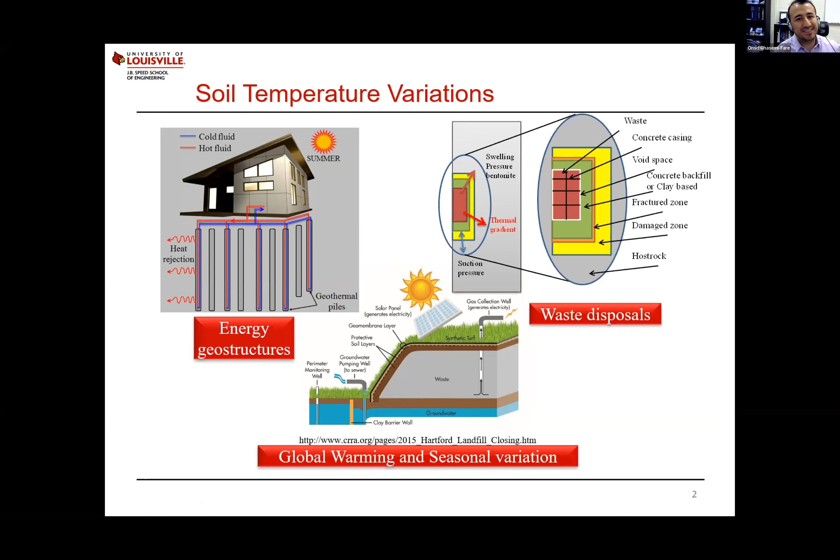Apart from energy geostructures, embedding nuclear waste disposals in the ground also changes soil temperatures, as does seasonal variation of temperature around the world. Different countries have different delta T between summer and winter, as high as 50 degrees or more, which affects shallow surface soil temperature changes. That's the scope and focus of our research: to understand the effects of temperature on soil behavior.

When we look at temperature's effects on soil behavior, we can see that temperature changes the hydraulic conductivity of the soil. The first thing that comes to mind is that groundwater properties are highly temperature dependent, like viscosity, so we expect different changes in hydraulic conductivity. But how about the intrinsic permeability—are we going to see any changes in the intrinsic permeability of the soil medium because of this thermal loading?

And also the strengths—can temperature changes affect the mechanical side, like volumetric changes? Can this happen because of temperature? We call this thermal consolidation.

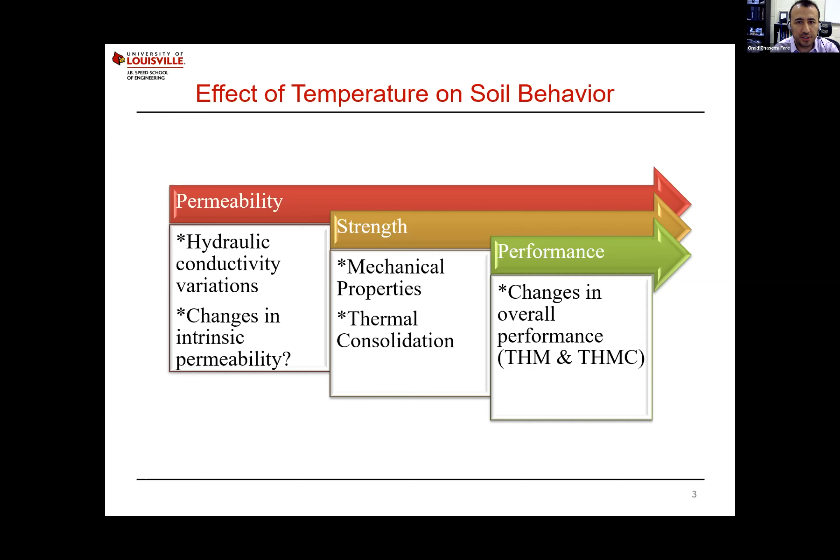Overall, temperature can change the whole system, which is highly interacted between the hydraulic system and mechanical system. So we have to provide good insight and develop a fully coupled thermo-hydro-mechanical modeling, or thermo-hydro-mechanical-chemical modeling, for different cases.

So the coupled thermo-hydro-mechanical modeling has three separate physics: hydraulic, thermal, and mechanical, which are highly interacted and interact with each other in this thermo-hydro-mechanical response.

For example, with hydraulic loading, when we have groundwater flow or any flow in the soil medium, that causes heat convection and changes the soil thermal response. On the other side, temperature itself can induce pore water pressure—that's the interaction. For thermal and mechanical, thermal loading may increase volumetric changes, and if we have porosity changes or mechanical load causing changes in soil volume, that will also affect the thermal properties of the soil.

Hydraulic and mechanical interact the same way. This is all highly interconnected, and we need a fully coupled system to better capture the thermo-hydro-mechanical response of the soil.

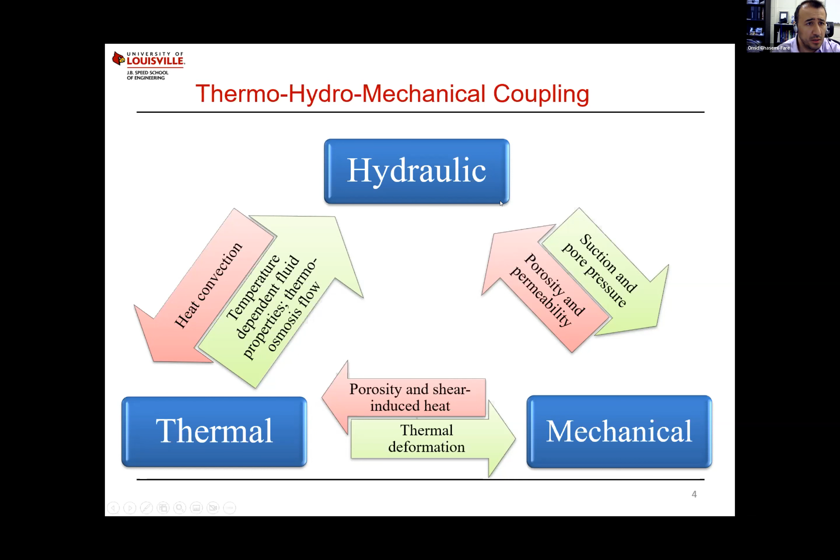The core of this study is focused on saturated soil. We are looking at temperature increments and the response of the soil due to this delta T, or thermal loading. But first, we need to classify this into two big categories: low permeable soil and high permeable soil.

Low permeable soil is what we know as fine soil, like silt or clay. High permeable soil is coarse soil, like gravel or sand. The reason I divide this—you'll see the results and understand why I make these two categories.

In high permeable soil, what happens is that a temperature increment can cause groundwater flow even under hydrostatic conditions—what we call thermally induced water flow, or thermally induced pore water flow. This flow can further change the temperature because of the heat convection mechanism.

In low permeable soil, because the permeability is very low, we won't see this significant effect—the thermally induced pore water flow is negligible. But because of low permeability, if we have thermal loading, we will have thermal pressurization, or thermally induced pore water pressure. Then, through generation and dissipation of this pore water pressure, we'll have thermal consolidation or thermal volumetric changes.

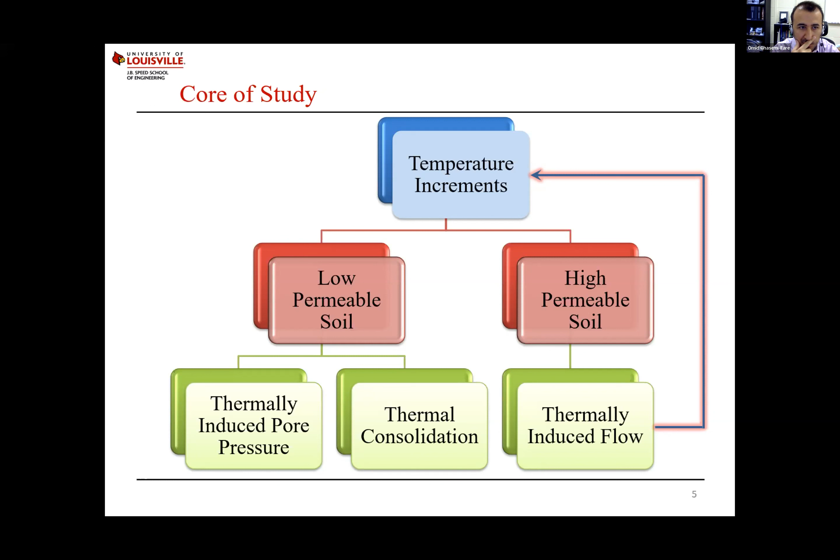During this presentation, I will go through different research tasks that we performed to answer our research questions. One task was the experimental side, to understand changes in permeability or hydraulic conductivity of the soils with thermal loading. We also did thermal volumetric change tests to understand the thermal consolidation of clays. After the experimental part, I'll focus on the numerical side of our research, which is modeling the hydrothermal behavior.

I'll first start with the hydrothermal modeling, called coupled heat and pore water flow, to show how temperature increments can cause thermally induced pore water flow. Then we have coupled THM modeling to capture thermal, hydraulic, and mechanical responses and the interactions between these three mechanisms. So first, I'm going to focus on the experimental research we did, starting with permeability tests.

To understand the effects of temperature on the permeability or hydraulic conductivity of the soil, we modified our triaxial cell and used a temperature-controlled thermal cell. Compared to a regular triaxial cell, this system has a constant water bath and circulated, controlled fluid temperatures inside the cell, allowing us to control and change the temperature of the soil specimen. We did some calibration, and then had the device ready for permeability testing.

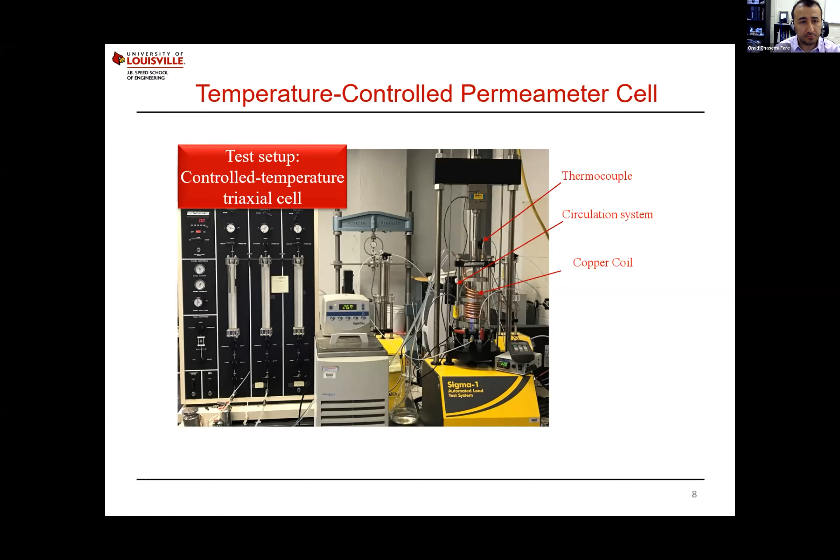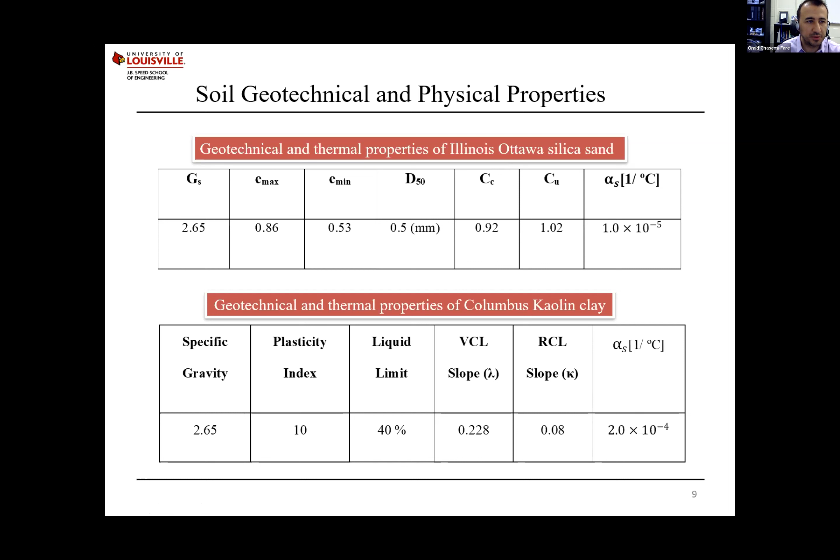We passed water through the specimen to understand how much the hydraulic conductivity would change under non-isothermal loading. We did this test for both Ottawa sand and kaolin clay, but today I'm going to focus more on the Ottawa sand, and I've provided the soil characteristics, geotechnical and thermal properties of the sand we used.

We have a specimen, we pass water through it to do a regular permeability test, but here we are increasing the temperature of the specimen to a target level. We started from room temperature, 20 to 23 degrees, and increased it all the way to 80 degrees centigrade. At each step, we measured the permeability or hydraulic conductivity at least 3 times to ensure repeatability of the testing.

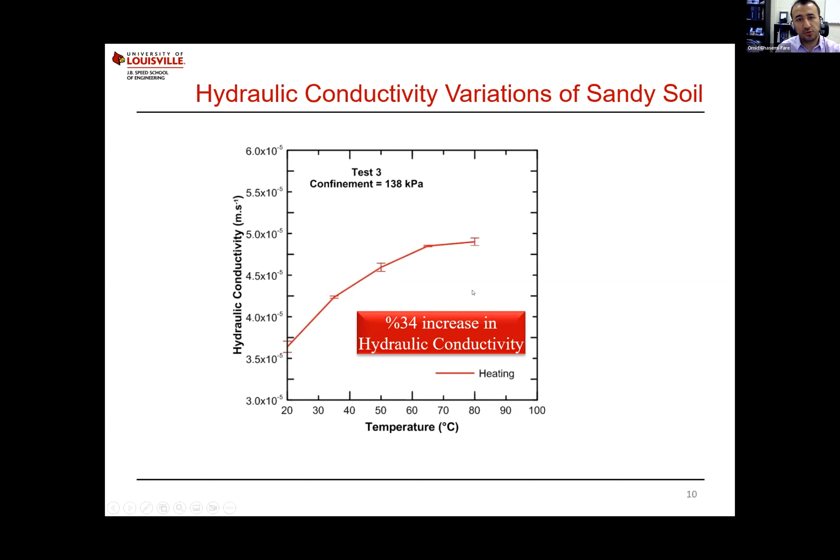What we see here is hydraulic conductivity versus temperature at different thermal loading steps. By increasing temperature, the hydraulic conductivity of the soil increases. We performed this test under different confinement, and as we can see, heating increases the hydraulic conductivity by 34%. But this raises the question: how much of this change is due to changes in water properties, like viscosity and unit weight with temperature, and how much is due to intrinsic permeability?

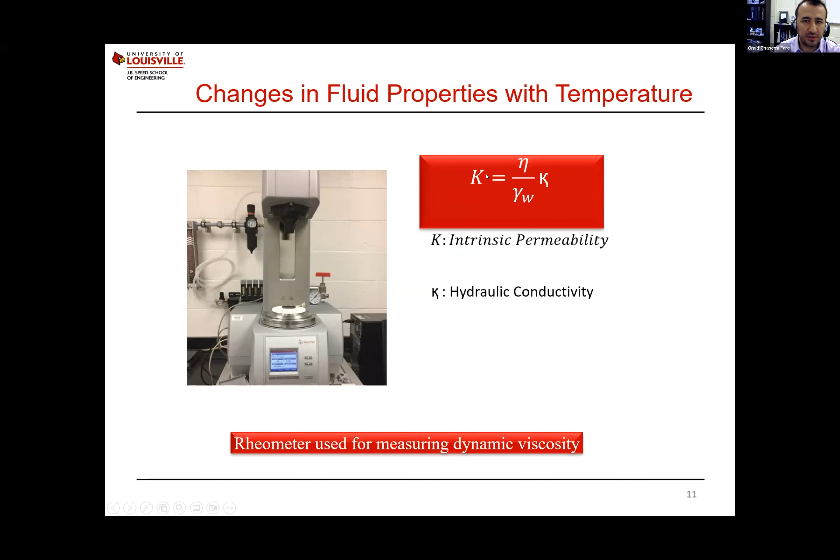To answer that, we measured the changes in viscosity of the water used in this test at different temperatures. Using the known equation relating intrinsic permeability and hydraulic conductivity, we calculated the intrinsic permeability of the soil at each thermal loading step. Interestingly, we see that as temperature increases from 20 to 80 degrees across different thermal steps, the intrinsic permeability actually reduces.

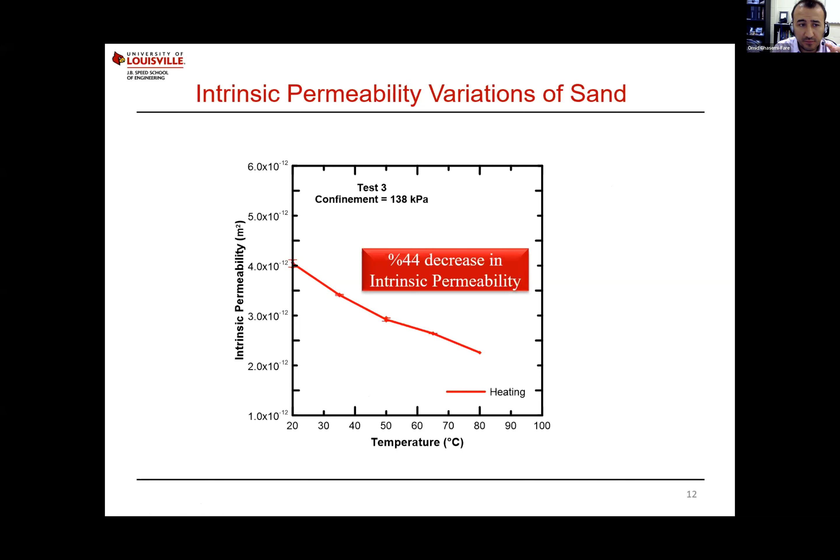This intrinsic permeability reduced by 44% due to heating, for the Ottawa sand, a sandy soil. This tells us that not only is hydraulic conductivity temperature dependent, but also the intrinsic properties of the soil, such as the absolute permeability, change with soil temperature.

I have these results side by side, but this is for a different confinement level. So we repeated this for test 5 under different confinement, and I'm showing those results. Again we see an increase in hydraulic conductivity with temperature, similarly around 40%. And as before, with the lower confinement, we again see a drop in the intrinsic permeability of the soil.

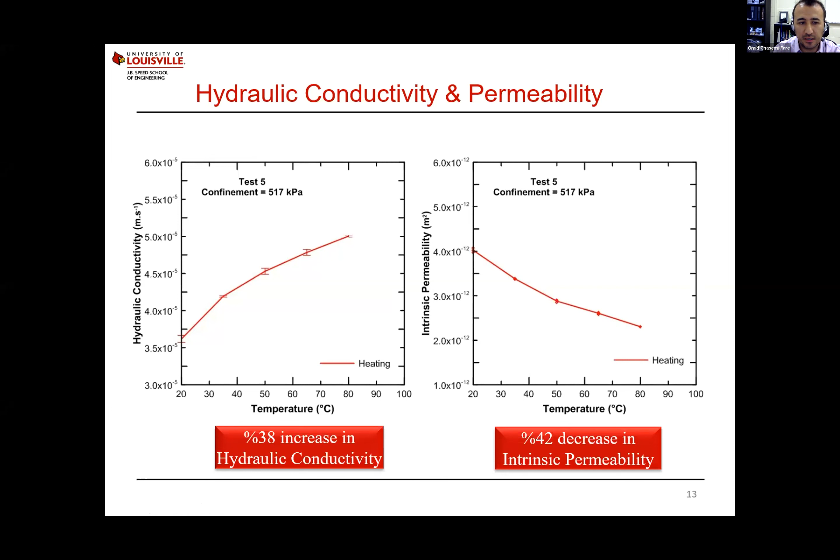When we see this intrinsic permeability drop, there are two reasons for that. One is soil rearrangement happening, where the tortuosity or pathway of the water can be changed. In addition, there might be volumetric changes in the soil, where we're compacting the soil further, and because of lowering the void ratio or reducing the voids, we see this lower intrinsic permeability with thermal loading.

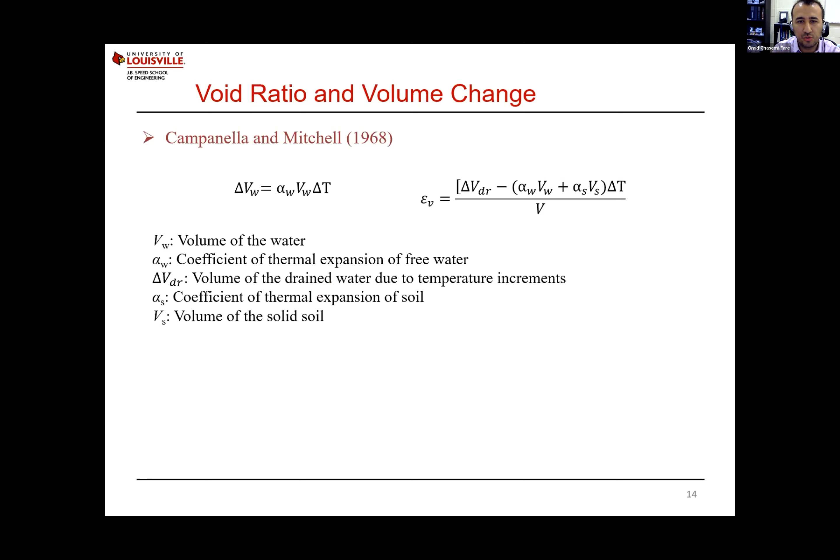To calculate the volumetric changes for this sandy soil, we measured during the test the amount of water expelled through or adsorbed through the specimen by heating and cooling load. Then by comparing with the expected changes in volume, we know the thermal expansion coefficient for water and the thermal expansion coefficient of solid grains. By knowing those exact values, we can calculate the total volumetric changes of the soil.

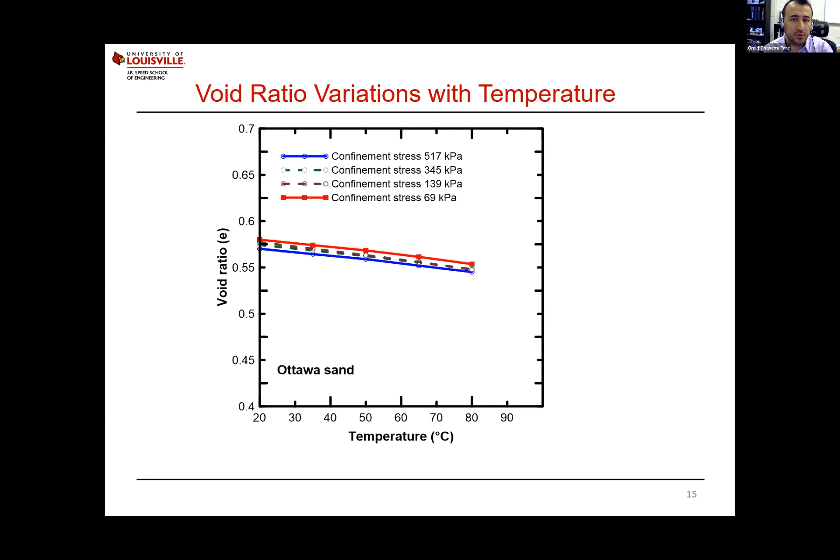We checked the void ratio changes and volumetric changes of the soil with temperature, and we observed a drop in the void ratio with temperature. We're providing the void ratio changes with temperature. So basically, thermal loading causes rearrangement and some reduction in void ratio, and that's the reason we see lower intrinsic permeability at higher thermal loading.

Next, I'd like to discuss the experiment we did on kaolin clay, focused on thermal volumetric changes in clay, which we call thermal consolidation. All of you know about regular consolidation - it happens because of generation and dissipation of pore water pressure due to mechanical loading. Now our loading is thermal, and because of this thermal loading in clay specifically, we'll have pore water pressure induced, and then dissipation, so we expect to see time-dependent thermal consolidation or thermal volumetric changes.

To do that, since we are going to run 3 cyclic heating-cooling cycles, we had to change to aluminum cells, and we repeated the test for several heating cooling cycles. We used our temperature-controlled triaxial cell, and we used a constant rate of strain, basically a CRS insert in the triaxial system.

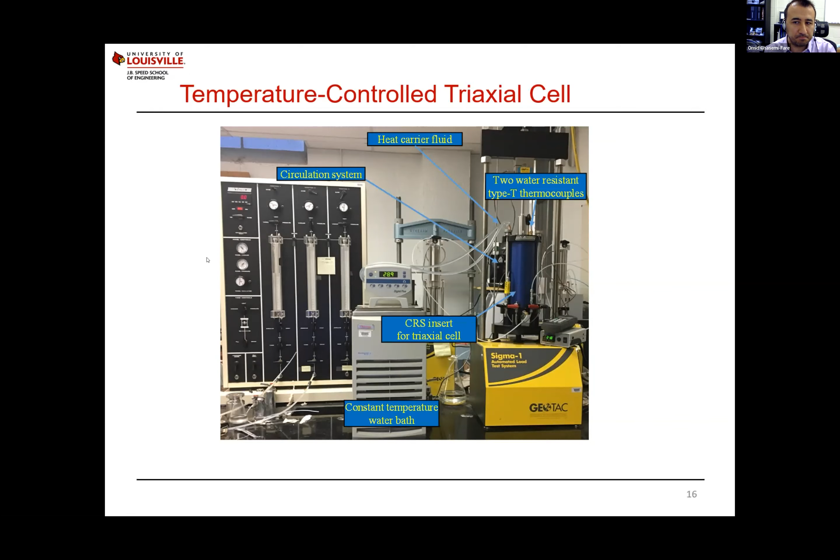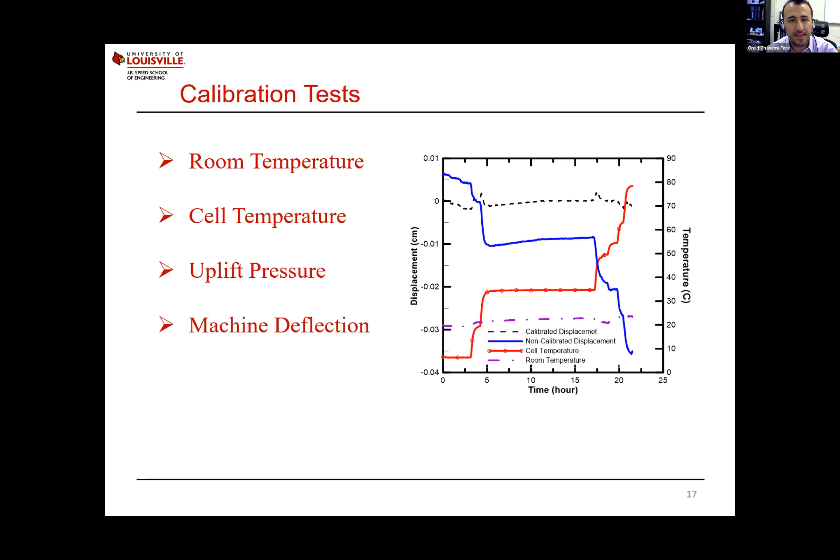Because we are dealing with thermal loading, before any experiment we have to calibrate the system, same as before. For this device and testing, we consider the room temperature, cell temperature, uplift pressure, and machine deflection that happens because of, for example, increasing the heating load. We heat up with dummy samples, then track the displacement measured at the triaxial system, and calibrate it. This dashed line shows the calibrated system - with dummy samples, there's almost zero displacement. Then we started testing, and this calibration is applied to every subsequent test.

We have the heating load. Initially we started with ambient or room temperature. Then we heated it to 35 degrees in one step, kept it for a day, heated for a second step, kept it for a day, another heating step, kept it for a day. Then we cooled it down step by step until we reached room temperature, and further cooled the system to explore the cooling load response, reaching almost 10.

8 degrees, and then we started to heat back for a second heating, or reheating.

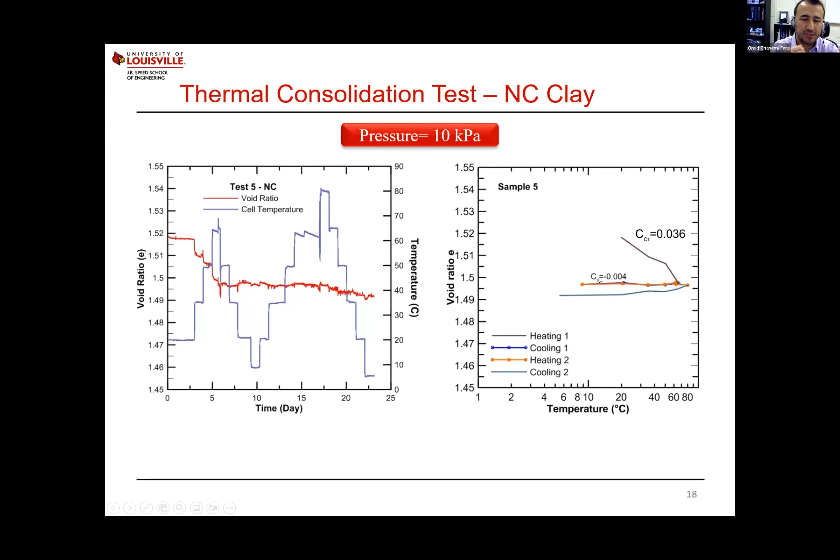We found the slopes of this, as a heating load or compression because of the heating, and this swelling because of the cooling indexes. We observed much higher slopes during heating but lower during cooling load, which is almost the same as what we see in regular consolidation.

We repeated this test several times, and at this step we changed the heating load. We kept each thermal load for 1 day, then we applied different heating rates, staying 12 hours up to 1 hour, and then 12 hours up to 1 day, with different heating rates for 3 or 4 heating steps. We wanted to see if that changed the results, so we heated in 2-step, 3-step, or staying 12 hours at each thermal step. We observed that 12 hours was enough for most of the thermally induced pore water pressure to dissipate within that time at each thermal step.

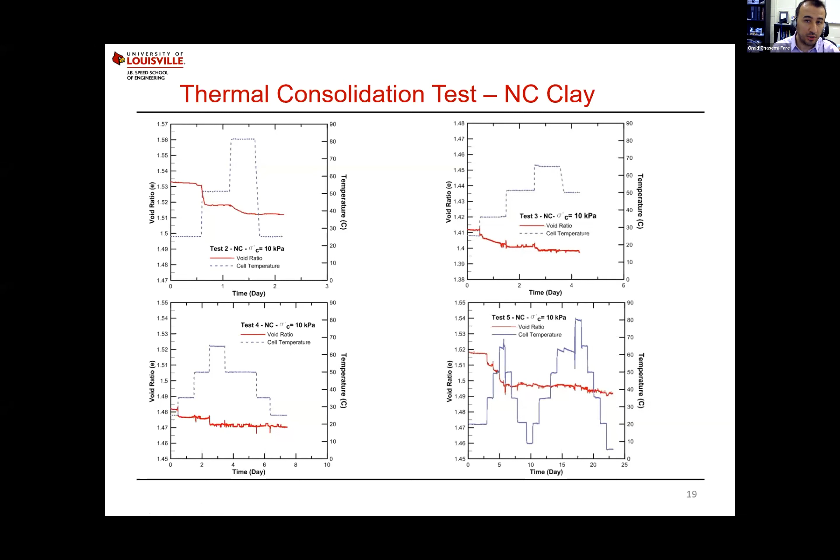In each of these tests, we saw similar behavior in thermal volumetric changes, or thermal reduction, the volumetric reduction with thermal loading, with almost the same slope. But those are for normally consolidated clay. We wanted to explore what happens with an over-consolidated soil, since we knew over-consolidated soil under mechanical loading also shows different behavior. So we performed a test on a highly over-consolidated sample with an OCR of 6.5.

This is void ratio again versus log of temperature. This time, instead of contraction behavior, we observe dilation behavior. By heating, we see this thermal expansion or dilation, and then cooling and reheating almost follow the same line. Then we further heated the soil up to a higher temperature, and the reverse behavior is observed, as we expected in over-consolidated soil.

So in normally consolidated soil we see contraction, while for highly over-consolidated soil we see dilation. At some point, with slightly over-consolidated soil, we'd expect a switch. We did some testing and found that at an OCR of 1.6, or slightly over-consolidated samples, temperature doesn't have any effect on void ratio changes—there's no or negligible thermal volumetric change at this OCR and confinement.

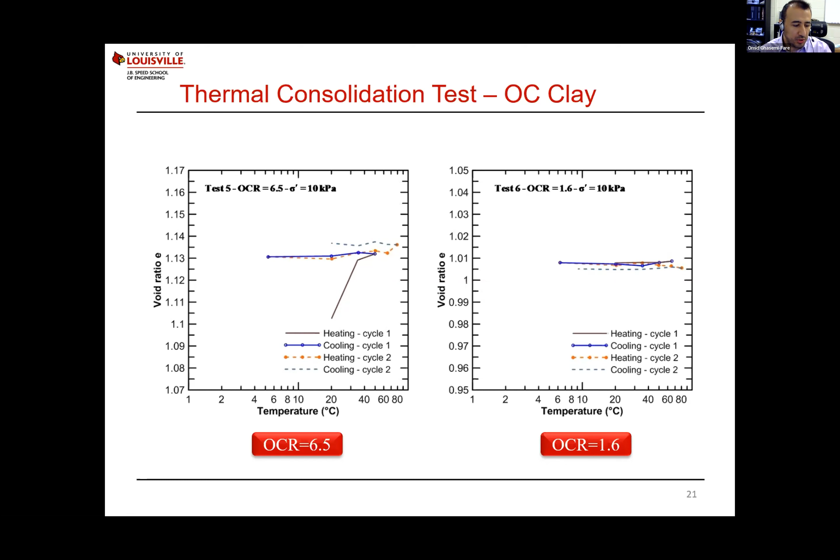We observed heating, cooling, reheating, and then cooling the system again, with no volumetric changes observed. If I plot temperature versus volumetric strain, I'm presenting the changes in thermal volumetric behavior in the kaolin clay by heating load at different over-consolidation ratios. This red solid line is OCR of 1.6, or slightly over-consolidated. When we have normally consolidated soil, we observe thermal contraction. But for highly over-consolidated soil, this blue dashed line with hollow squares, we see the different volumetric behavior observed for kaolin clay.

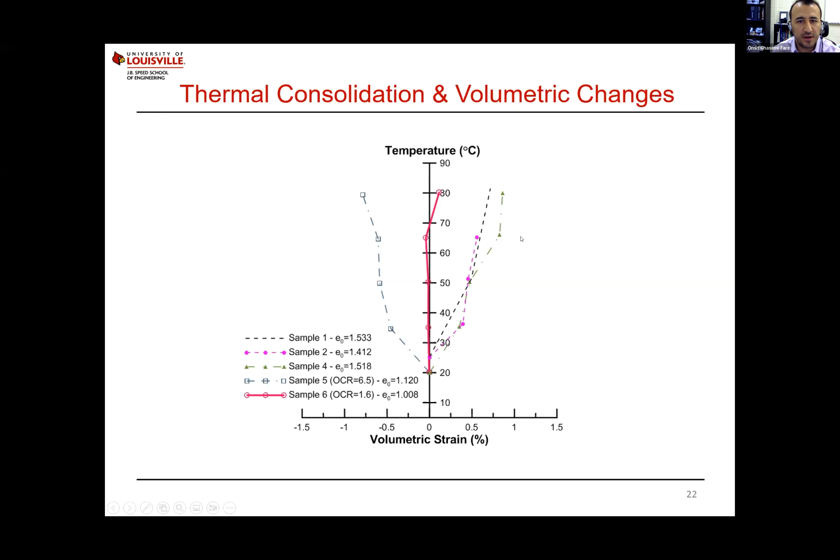By comparing this experiment, we gain insight into the thermal effects of temperature on permeability, intrinsic permeability, and hydraulic conductivity of the soil—that can be an input to our numerical model, the changes in temperature and its effects on hydraulic conductivity or absolute permeability. We also observe that there's a time-dependent thermal volumetric change in kaolin clay: thermal contraction at low confinement with OCR of 1, and thermal expansion in highly over-consolidated soil. Now I'm going to focus on the numerical side—some of this experimental data will feed our numerical model, and some can be used for validation purposes.

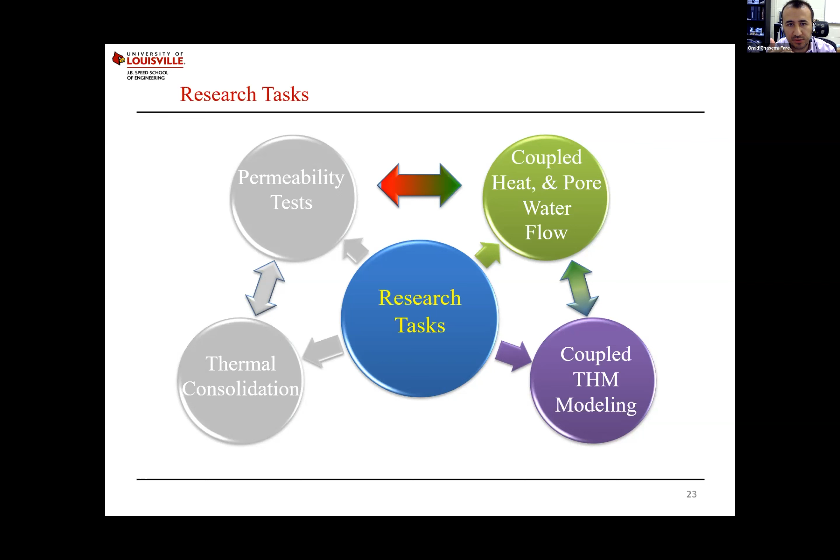To start with a numerical model, I would like to first start with the coupled hydrothermal loading, forgetting about mechanical for now, and see the coupling that happens when we have a thermal and hydro response of the soil. Then I will show you results for a fully coupled thermo-hydro-mechanical model.

To better show that temperature can induce pore water flow even under hydrostatic conditions, I'm going to present a very classical problem: a cavity problem, specifically from mechanical engineering, that works in the porous medium. So this is a cavity problem with a high porosity or high porous medium.

We have isothermal conditions, no thermal loading, at the right and top of the boundary, and at the left and bottom we have thermal loading. At the bottom we keep T as a higher load, and the thermal loading starts from the bottom left corner and diminishes all the way to the top, going from TH to T naught, fixing to a constant temperature at the top and right. We also have gravity, and this is just a high porous medium.

If we only consider heat conduction in the porous medium, as we always think heat conduction is the dominant mechanism in the porous medium, this is what we observe. We developed a numerical model in our group considering only heat conduction.

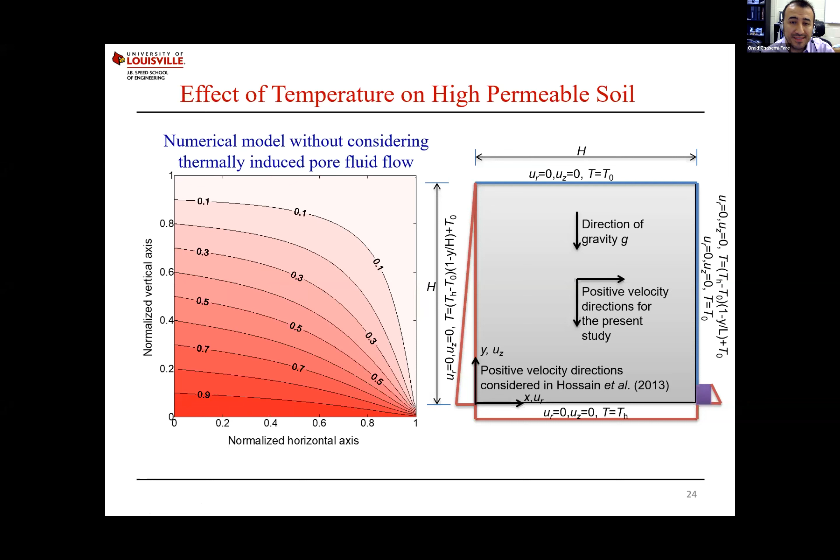But if we would like to explore the fully coupled thermo-hydro model, what equations do we need to solve? First is the energy equation, for changes in temperature, which includes a convection term where U is the groundwater flow -- under hydrostatic conditions it can initially be 0 -- and then a conduction term.

Then we have the continuity equation and Darcy's law. In Darcy's law we also need to consider the force term due to gravity, although if there's no change in gravity or the force term, this can be canceled out. But because the density of water is temperature dependent, based on the Boussinesq approximation, the density of water depends on beta, the volumetric coefficient of thermal expansion of water, and delta T, the rise or cooling in temperature of the water.

If we consider the changes in density of water and insert this into the force term, it generates some velocity. By changing this groundwater velocity, we expect to see a difference this U generates, and with different U we expect different temperature. Again, if you have different temperature, you get a different response in the density of the water. That's actually how it couples the system.

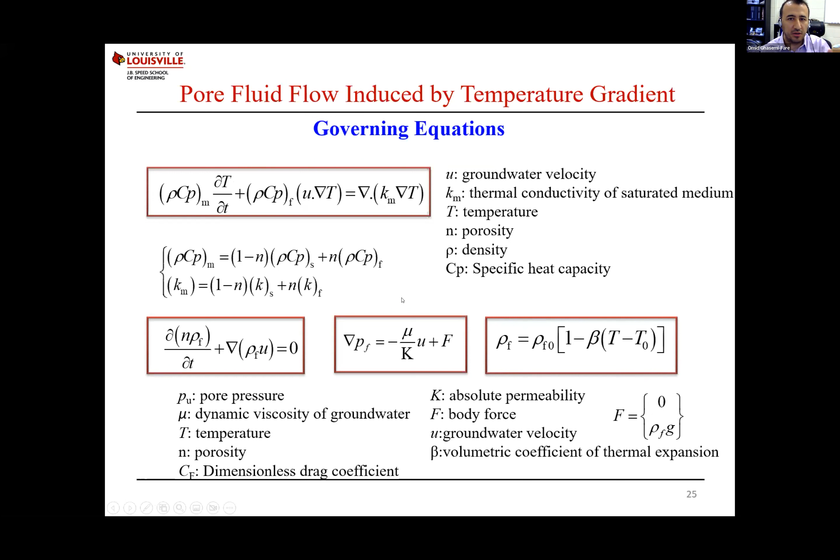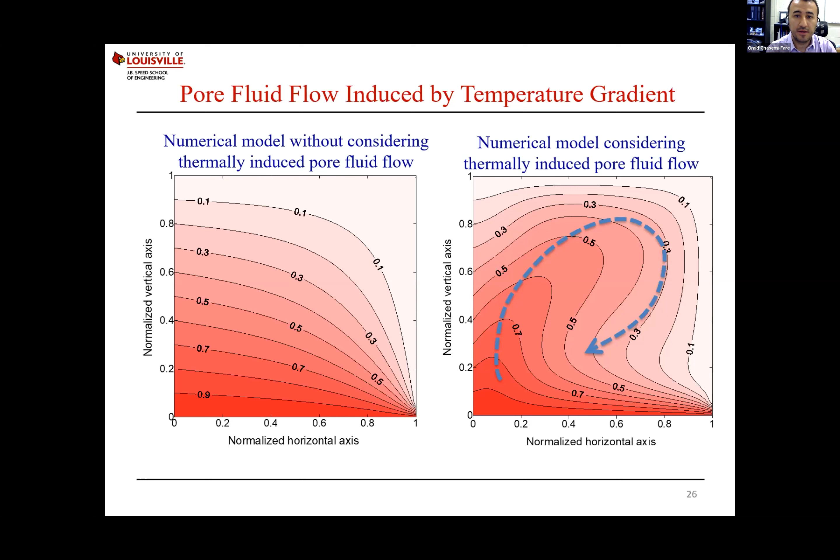After proving this, after showing that this is happening, we would like to explore this behavior for energy pile applications -- for example, energy piles in the ground, or geothermal energy systems, or any energy geostructure that we have in the ground.

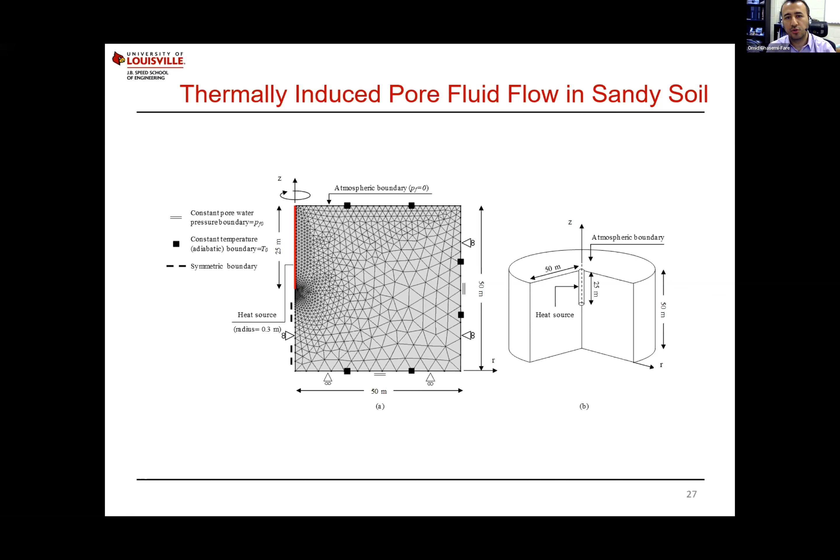To see a soil thermal response close to this heat source in the ground, we modeled a 25-meter energy pile under axisymmetric conditions, exploring different intrinsic permeability of the medium, from very fine to coarse soil. Do we expect to see this behavior in ground conditions?

I'm showing results for two different absolute permeabilities, from 10 power minus 10 to 5 times 10 power minus 13, from coarse sand to fine sand or silt. Here is the heat source, and the arrow shows the direction of induced pore water flow due to temperature. For high permeable soil, we observe higher induced pore water flow in the medium compared to low permeable soil.

So if we have higher permeability in the medium, there is generated pore water flow, induced toward the heater, accumulating close to the heat source. This becomes less and less as the induced pore water velocity decreases with decreasing permeability of the soil medium.

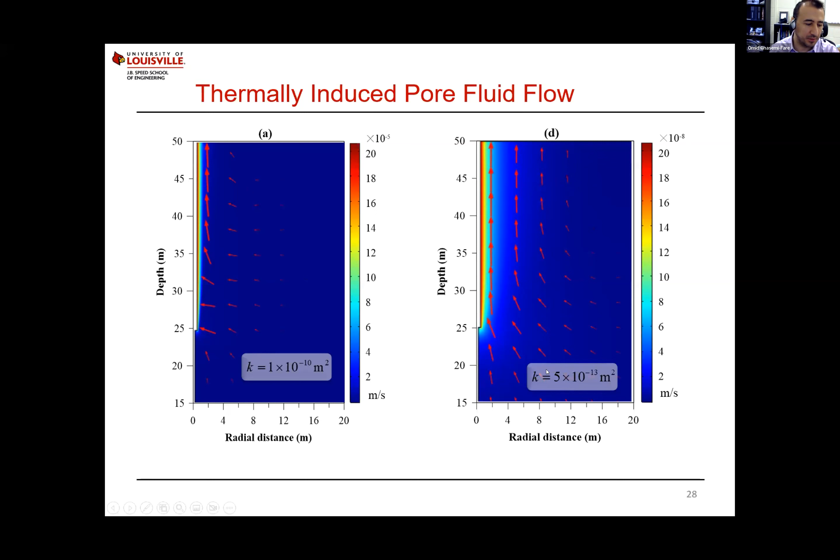The reason is that when we decrease permeability, the effects of thermally induced pore water flow become negligible compared to heat conduction, which becomes dominant. But with higher permeable soil, the thermally induced pore water flow effects become more significant, and heat convection also plays a role in the heat transfer mechanism.

Looking at fluid velocity, which starts at hydrostatic condition with zero fluid velocity, the velocity shown here is purely due to thermal loading, plotted from radial distance from the heater. As we decrease permeability, fluid velocity decreases by orders of magnitude, and this has a negligible effect on the thermal response of the medium.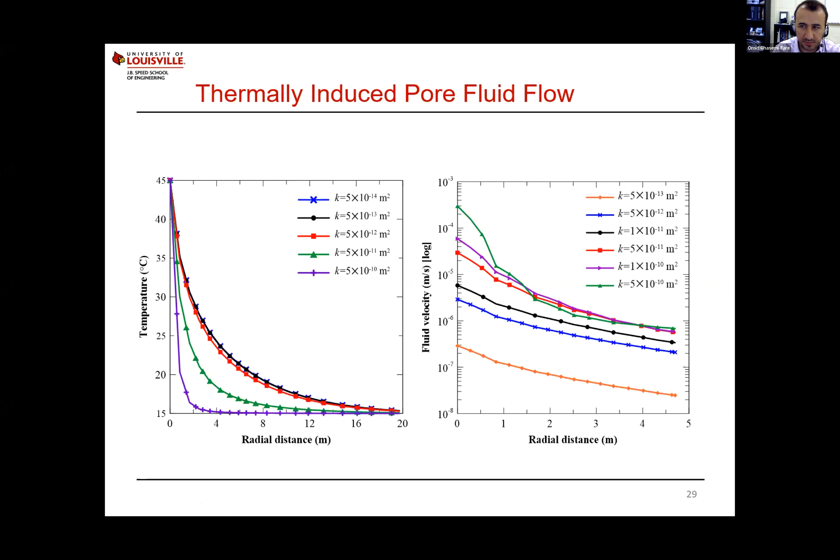Now that we've seen this in thermo-hydro modeling, I'll move to the next and last modeling part: thermo-hydro-mechanical modeling. This is why we classified zones as low permeable and high permeable—in low permeable zones, there's no thermally induced pore water flow effect.

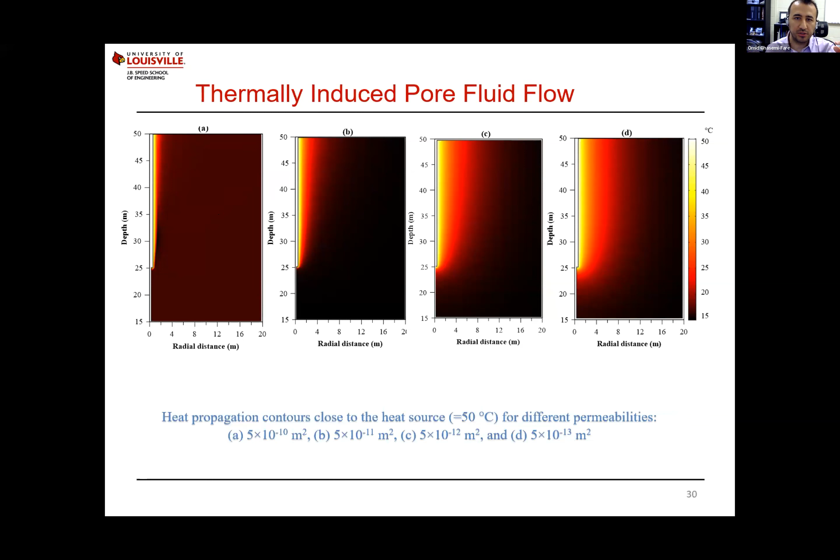We need to look at different scenarios, such as thermal pressurization. In high permeable soil, pore water pressure dissipates fast, but we do see circulation of water into the soil, which is why I classified this into two categories. With fine soil like clay, under thermal loading, we expect the thermally induced pore water flow to have a negligible role, but what about thermal pressurization and thermal volumetric changes that may happen?

To explore that, we developed a fully coupled thermo-hydro-mechanical model. At the beginning, I'll first show you the thermo-poro-elastic model we developed.

We developed a simple constitutive model, the thermo-poro-elastic model, to observe this behavior, and then we further investigated the effects of plastic strain using more advanced constitutive models. After developing a thermo-hydro-mechanical model, we have to validate our model.

We used the results of the Atlas experiment, performed in Belgium. This experiment took several years, many years, and the results I'm showing here are for at least a couple of years.

What happened is they embedded a heat source in the ground. At Mol, for example, they have boreholes and galleries under the ground, and within this gallery they have horizontal sections where the heat source was embedded, as shown here. This is the main gallery, and perpendicular to that we have a heat source. At different distances from this heat source there are measurement boreholes to measure temperature, pore water pressures, and total stresses. As you can see, this is vertical and that's horizontal.

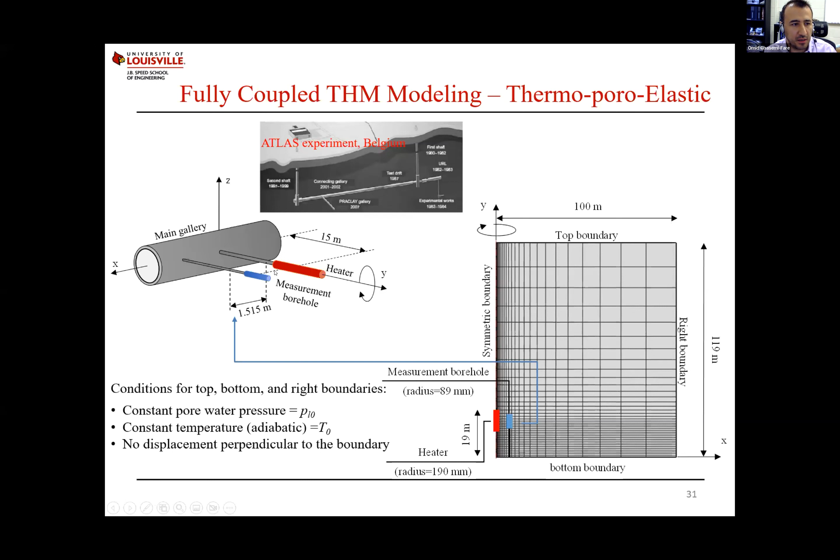This is the direction of the heater, so we modeled the area surrounding this heat source. We developed an axisymmetric model around the heater, assuming it is deep into the soil and that we have axisymmetric conditions for the area we are focusing on. Here we have the heater, and this is the measurement borehole.

We considered the changes in the porous medium properties, like water properties and how they change with temperature, which is very important - viscosity and other properties of the soil and water dependent on temperature.

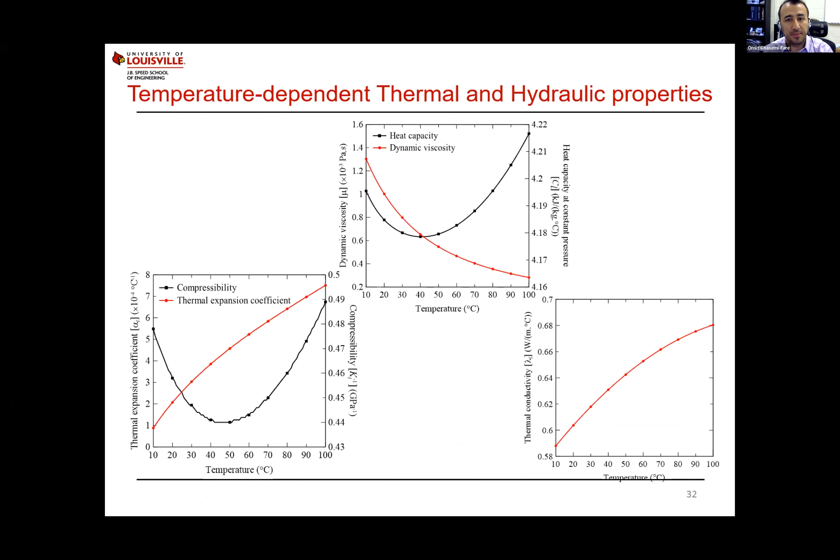We developed a thermo-hydro-mechanical model, solving the fluid mass balance equation, solid mass equation, soil equilibrium equation, and energy equation combined and simultaneously. We have the heat source, the heating load at the heat source.

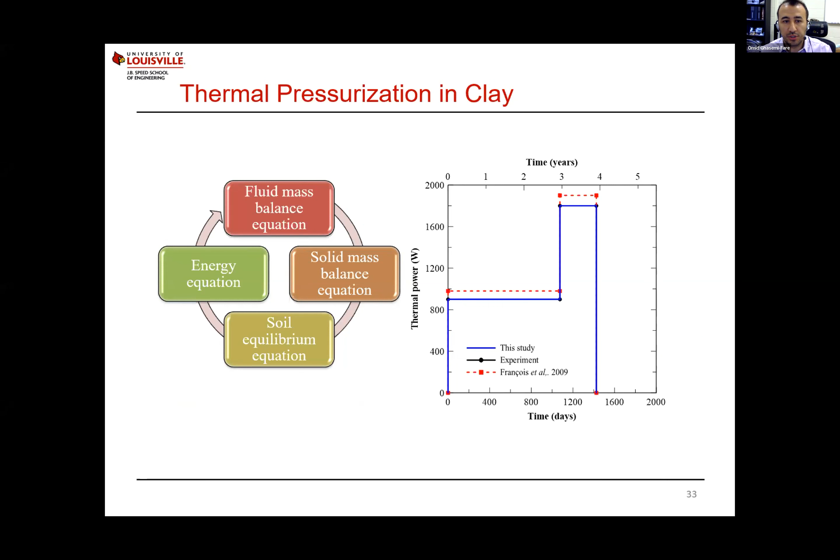For this specific experiment, it took about 5.5 to 6 years. There was a heating load of 3 years, then a second heating load of 1 year, then cooling of the system, and then they tracked the performance for 1 or 2 more years after the cooling load. I'm comparing the results we have for our thermo-poro-elastic model.

On the left side, I'm showing the thermal variations, temperature versus time. The blue line is this study, which is thermo-poro-elastic. The black dashed line is the experiment, and the red one is François et al. 2009, which used a thermo-poro-elastoplastic model. For temperature, there's no issue - all these models can capture the thermal response because in this kind of condition, heat conduction is the dominating mechanism.

But when we look at the pore water pressure variations, or thermal pressurization inside the soil - the pore water pressure variations over time - again blue is our numerical model and the dashed line is the experiment. We can say that during the first heating cycle we have some error, but it's acceptable. In the second heating and especially the cooling, we better capture the experimental performance.

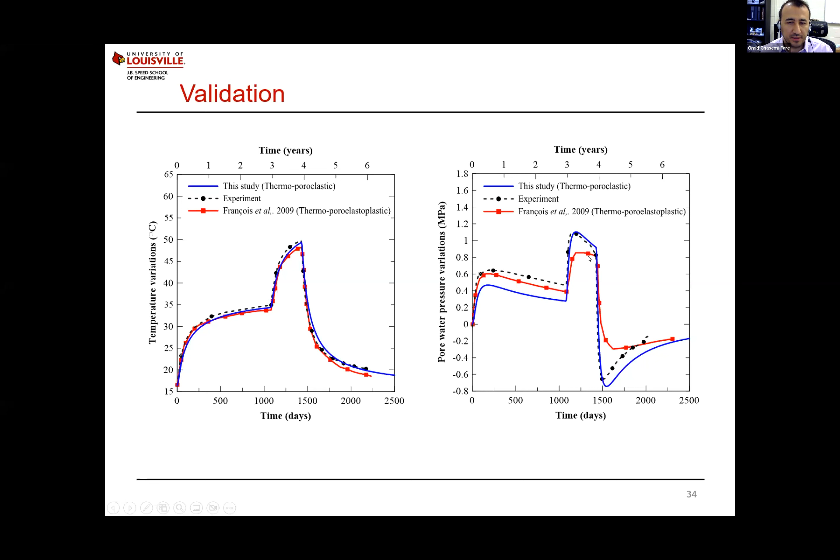But when we look at the radial or total stress variations, since we're using a thermo-poro-elastic constitutive model and comparing with the stress, we see our model is not capturing the experiment well enough. But compared with the thermo-poro-elastoplastic model that François had, they haven't captured it well either. The difference between our model and François et al.'s is that our model is thermo-poro-elastic, while their model is a more advanced poro-elastoplastic model.

On the other side, we consider fluid properties - as I showed earlier in the presentation, water properties are highly dependent on temperature. So in our model, every parameter is temperature dependent. Because of that, we could better predict the stresses than the advanced model, even though our model was simpler, because we considered the strong variation of fluid properties with temperature.

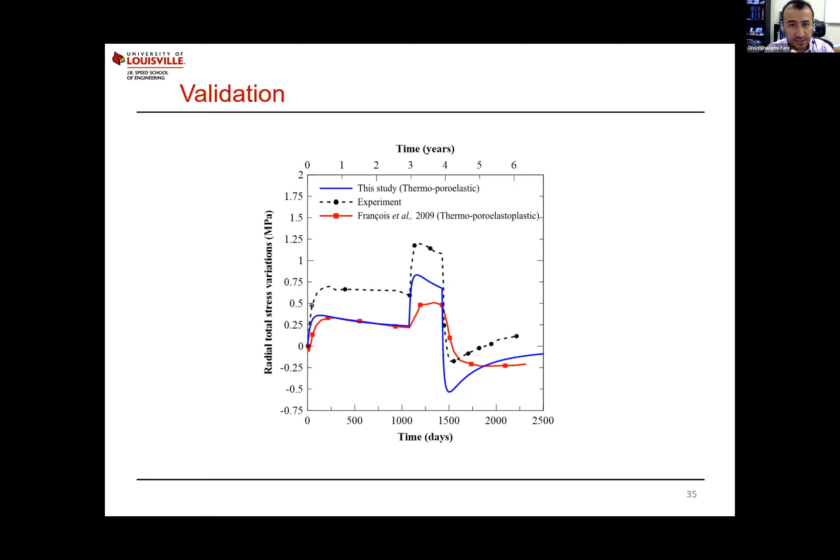Now I am showing our advanced model, which is a thermo-poro-elastoplastic model. This is the same setup, but a different heat source, using the same Atlas experiment but with different heater locations and different types of heating and cooling loads.

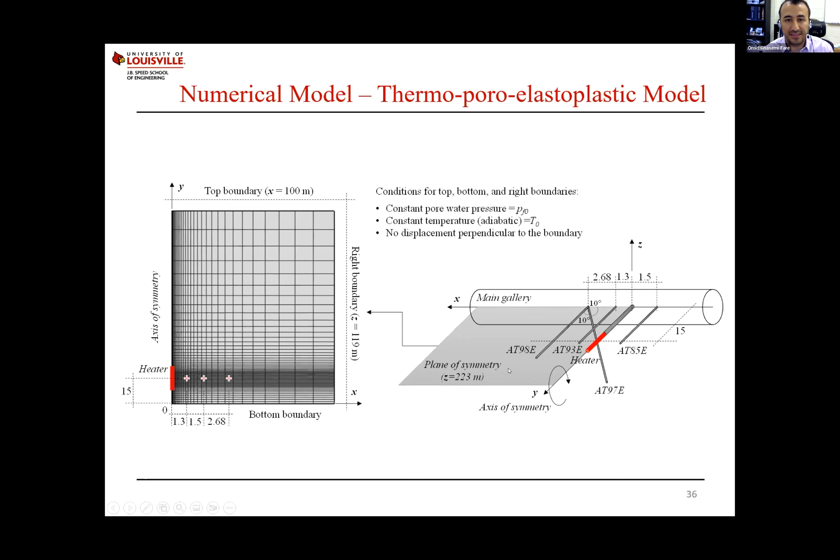So we have AT98E and AT97E, these are the different galleries they had. We have again heat source, and then two different measurements at different distances from the heater. The gray shaded plane is the axisymmetric domain that we modeled.

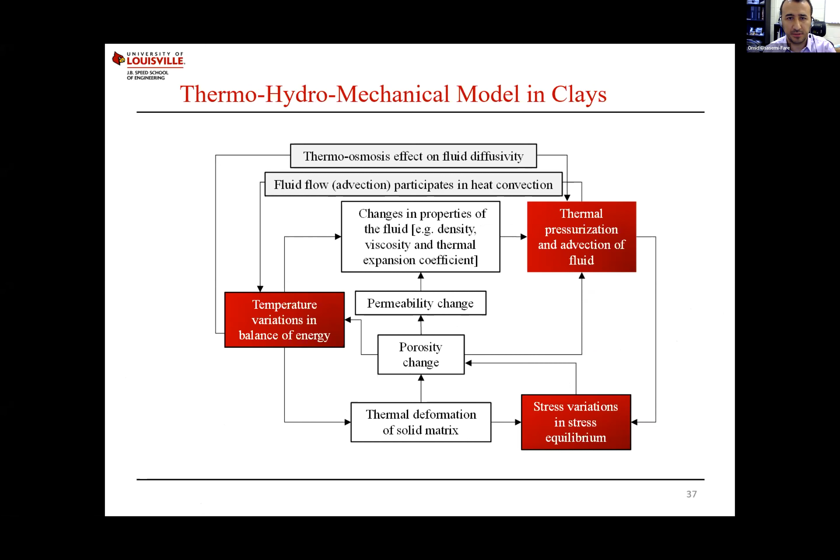We developed a fully coupled thermo-hydro-mechanical model, considering every mechanism that can happen in the medium. We consider this as a thermo-poro-elastoplastic model, developed by Laloui et al. and his students in his group.

Basically we can call it a modified Cam Clay, which is the yield function, the volumetric yield limit, and also the slope of the critical state line is a function of temperature. We basically use this constitutive model.

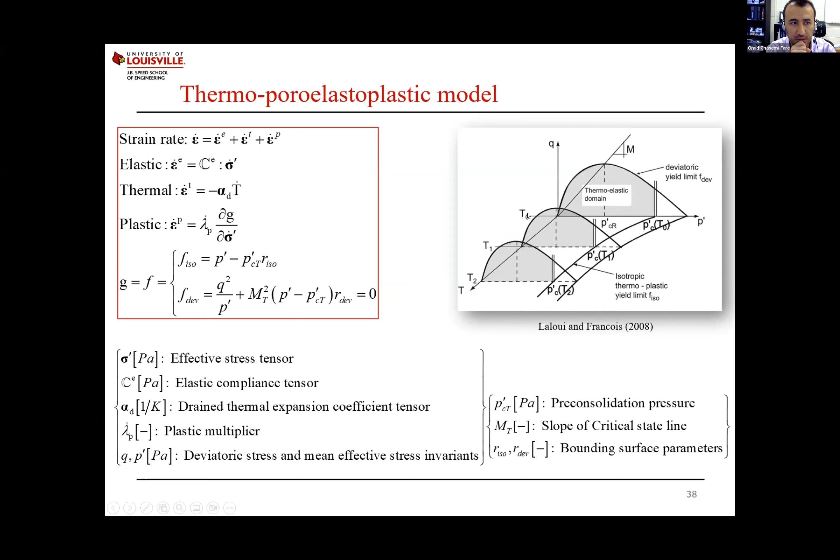We developed 5 different models, from the elastic model with constant water or fluid and porous medium temperature. Model 1 is independent of temperature; soil and fluid properties are constant. Model 2 is the elastic model, same as before, but considering variable, temperature-dependent properties.

Model 3 is a plastic model. Models 4 and 5 are again elastic and plastic, but considering all the mechanisms happening in the medium, like chemosmosis and thermosmosis. This time we have 3 different heating and cooling cycles.

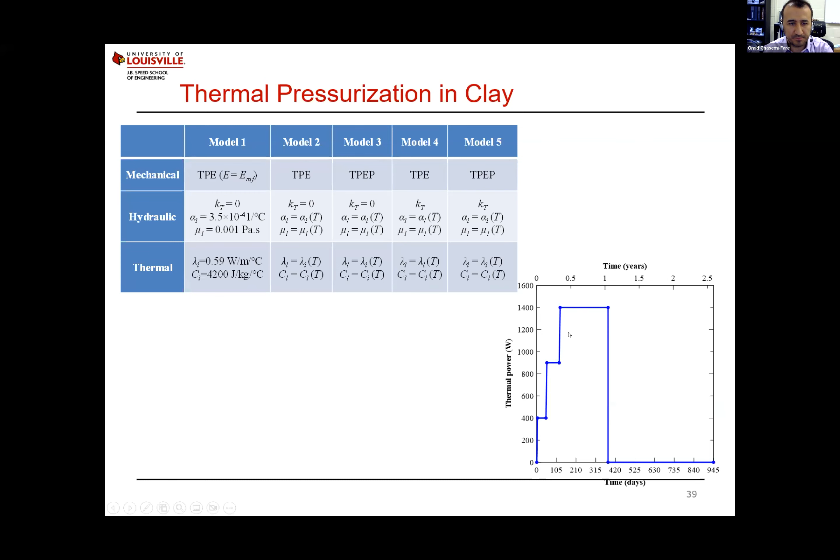If we look at temperature distribution, this is the temperature variation with different time, and we expect and do see all the models accurately predict the temperature response in the medium.

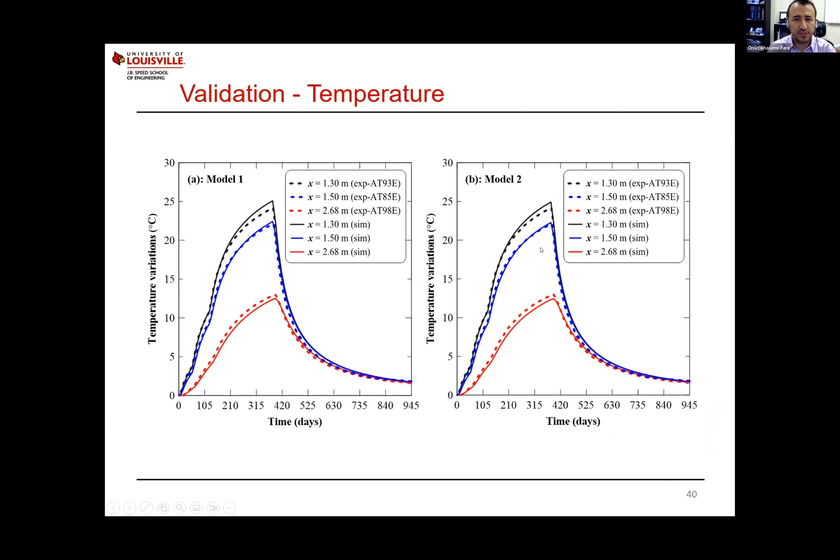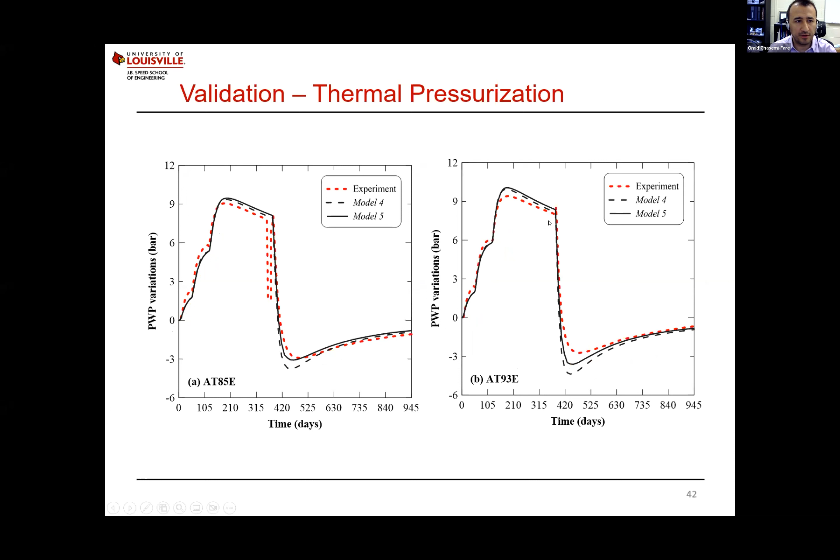All the models can capture the pore water pressure distribution well enough. You can see models 4 and 5 also predicted the pore water pressure with good accuracy.

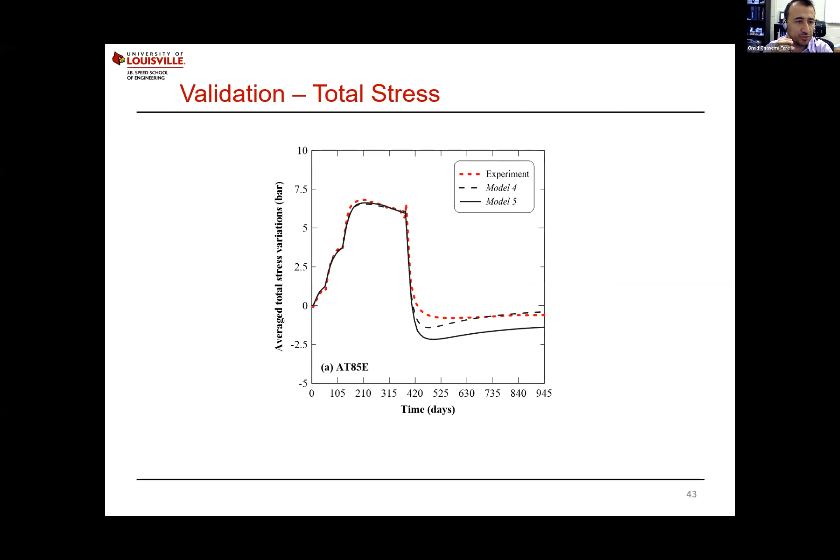But as you remember, last time we had difficulties capturing the thermal stress in the medium. This time we have a thermo-poro-elastoplastic model considering all the mechanisms in the medium, and as we can see here now, we can capture the thermal total stress variation in the medium matching experimental results.

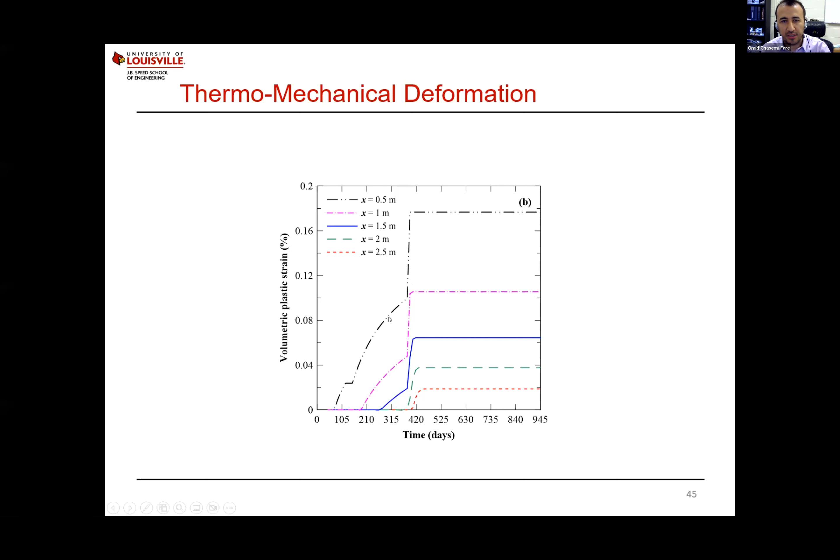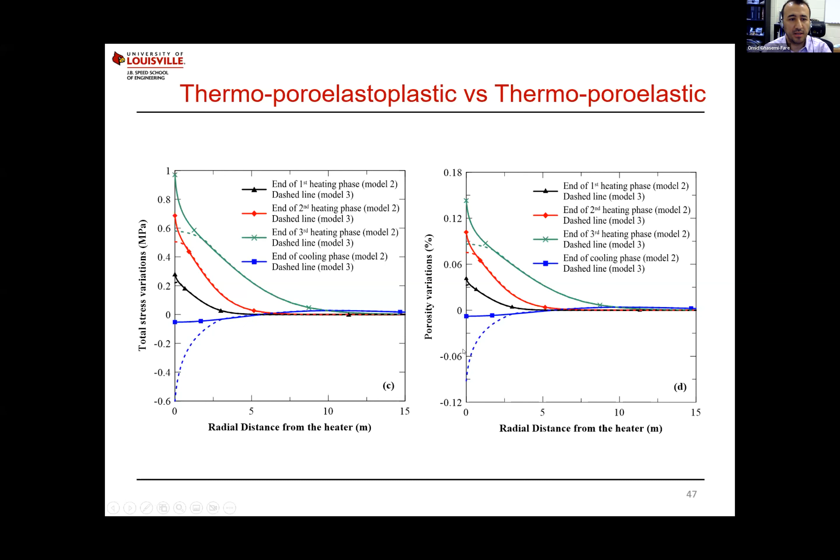By heating we have some increase in stress, and then changes in the total stress occur during the cooling down. Looking at the right side, which shows the volumetric or porosity changes with the heat source, at the end of the cooling we do see some permanent changes in the plastic strain happening at the end of the cooling phase.

My last slide here shows the changes in volumetric plastic strain comparing two scenarios, both thermo-poro-elastoplastic models. One considers constant fluid properties, like constant thermal volume expansion, and the other considers variable thermal volume expansion of the water.

Simply considering variable properties of the water could change the amount of plastic strain happening or measured inside the medium. So this is a side-by-side comparison of thermoplastic strain.

This is for the first model, at the end of 1 year, at the end of the first heating, at the end of the second heating, after 4.5 years and 6 years. Same setup, but as you can see, we observe higher plastic strain when we consider the variable thermal expansion coefficients.

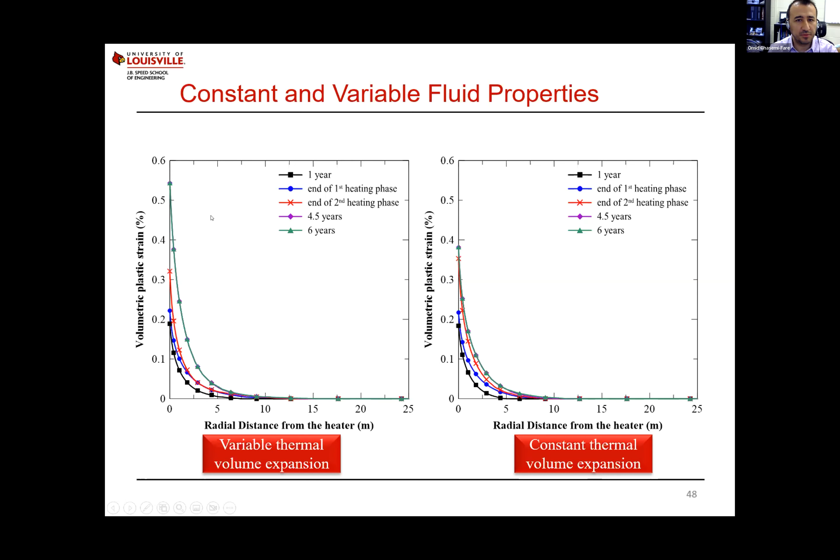To wrap up the presentation, I'll share some of our observations and conclusions so far. First, the effect of heat transfer mechanism is different in high permeable soil versus low permeable soil, and that's why we have to consider them as two different categories when analyzing the thermal response of soil.

We observed that the intrinsic permeability of sandy soil can be changed with heating, and we saw a drop of 40% in soil intrinsic permeability in sandy soil when the temperature rose from 20 to 80 degrees centigrade.

We observe that thermally induced pore water flow has a significant effect on the heat transfer mechanism in sandy soil or coarse sand, while it has a negligible effect in low permeable soils like fine sand or silt or clay.

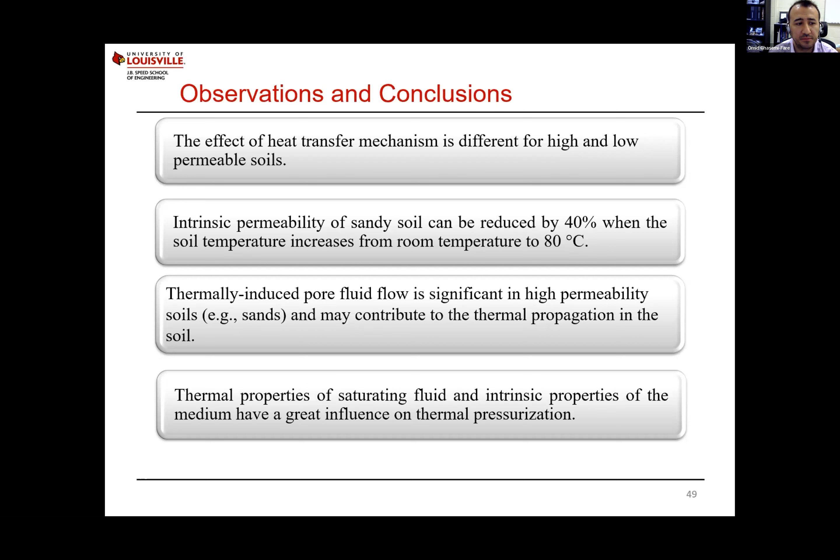But on the other side, in clay soils and low permeable soil, when we have thermal loading, we will have thermal pore water pressure, or thermal pressurization, which further changes the hydraulic and mechanical response of the soil. We observe that thermal properties of the saturating fluid and intrinsic properties of the medium have a great influence on thermal pressurization.